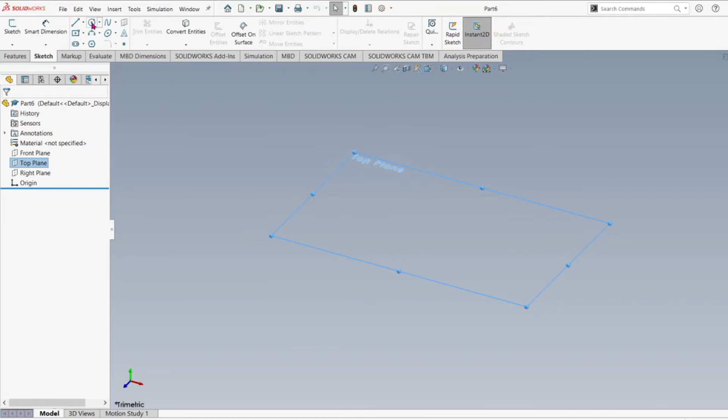First of all, we're going to go up to File, left click. We're going to click on New, left click on Part, say OK. Going to make a quick circle. Going to use the top plane, going to left click that to select it. Then I'm going to go up here to circle, left click. I'm going to lock it to the center, just going to drag it out.

Let's go ahead and put a dimension on that. I think we can do it in several ways. You can highlight this box down here and type 5 inches. Or you can put a smart dimension on it. I like doing smart dimensions because then when I open the sketch I have the dimension right there in front of me. So I'm going to change that down to 5-inch diameter and we're going to say OK.

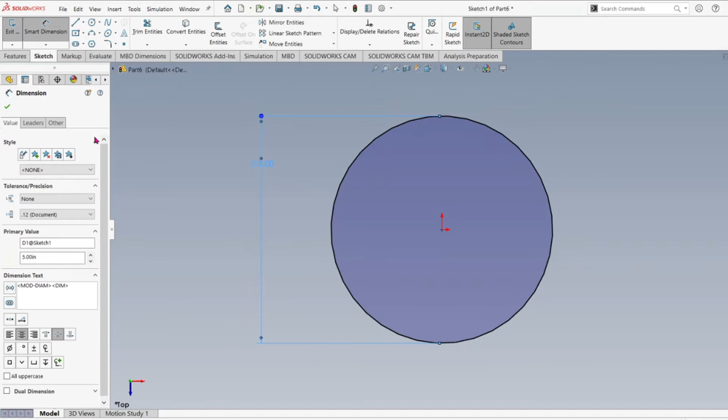Then we're going to do a feature. We're going to do an extruded boss. And I'd like to usually go in the opposite direction there. We're going to do a blind and I'm going to give it a dimension of 2 inches. Maybe we'll change that to like 1.5 inches.

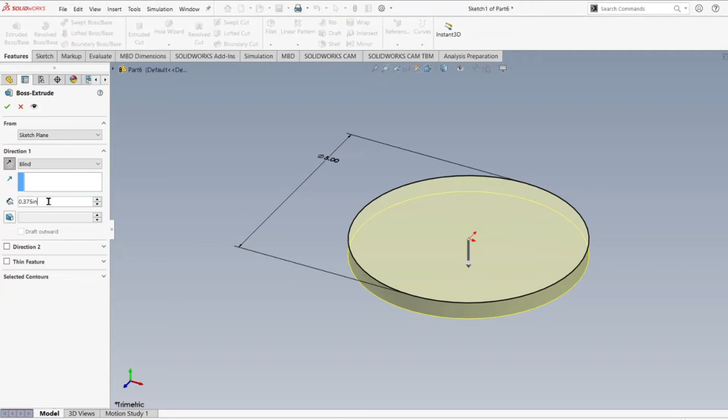Now anytime you want to, this can be a calculator. Let's say you don't know the decimal equivalent to 3/8. You should be able to type 3 divided by 8 and it should give you the .375 decimal equivalent. Most of these dialog boxes will allow you to do the math right inside the dialog box. Let's say you don't know what 13/16 is, so you go 13 divided by 16, and that'll give you the .812 dimension. So let's just leave it there and left click on the OK box, and that creates a solid plate.

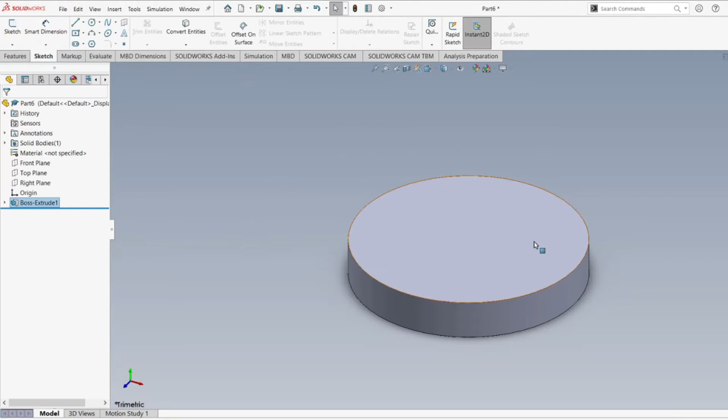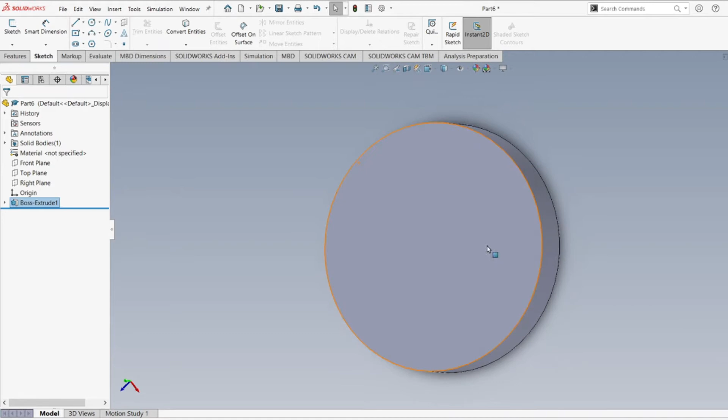There's a couple of ways. Let's first off start with the hole wizard. We got to put a hole in there. I'm going to do a tapped hole, and I want to do a bolt circle around this circle. I don't know if this is the best way, but I'll show you a couple of ways to control the bolt circle. So let's go up here to hole wizard, which is under features, drop down on the arrow, click hole wizard, left click on that.

And it gives us all different types of hole types we can do. We can do a counter bore, a counter sink, a straight up blind hole or through hole. Then we have a straight tap, which is the one we'll be using. Then here we got a tapered tap, so an NPT tap. Then here we have a customizable counter bore hole.

These counter bores up here are basically standards for, let's say, a 3/8-16 Allen socket head cap screw. This is the size in the machinist Bible that you should make your holes to. This would be a counter bore that you could customize. And then we also have the counter bore slot, countersink slot, and just a regular slot. So you can pick each one of these as a different attribute.

So for right now I'm going to do a threaded hole. I click on straight tap, left click. Then I drop down here to the size and pick a size. Should we do 1/2-13? So roll down here to 1/2-13. There you are. So that's 1/2 inch diameter, 13 threads per inch. Through all is what I'm going to do, not a blind hole. If you wanted to do a blind hole or up to next, you do blind and then you can put the dimension in here. In this case, I'm going to do through all.

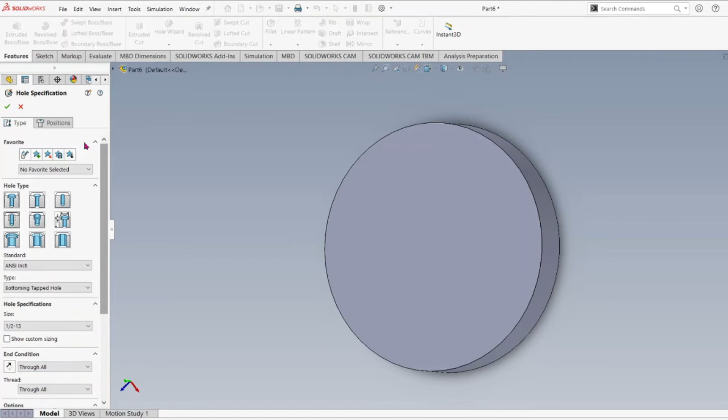So now I pick a position. The position tab up here, I left click on, and I just roll over here and click a spot on that face. The first time it clicks, it picks the face or the plane, and then the second time I'm going to just drop it in there. I'll dimension it later.

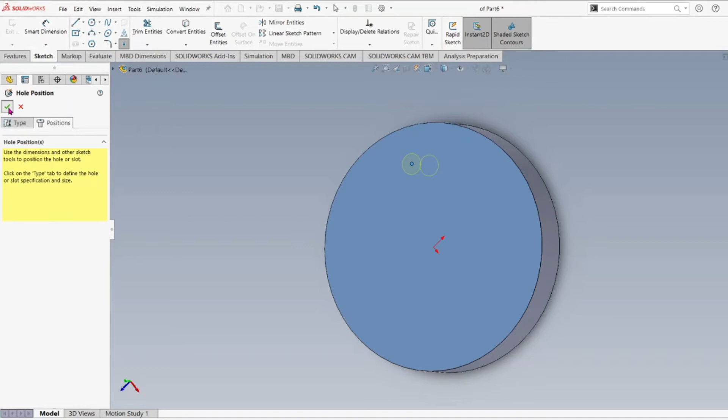I'm going to say OK to that, and there's our one threaded hole. What's nice about the hole wizard is that all this information that's in here, when we go to make a drawing, when we go and pull up the hole callout on the drawing side of things, it'll have all the information already there, so we don't have to retype it all in. It's going to pull the data off of this information here and then display it in the drawing.

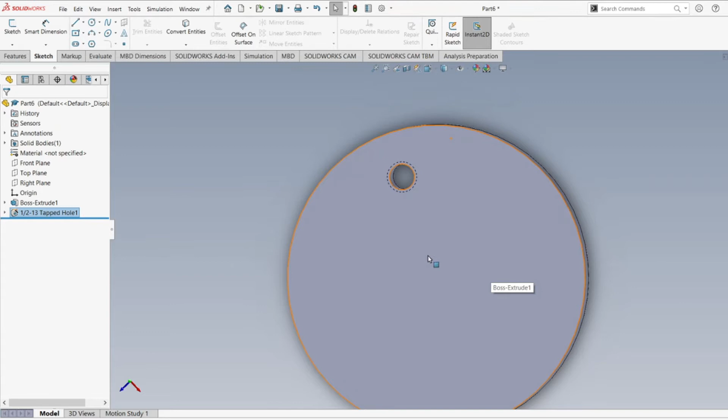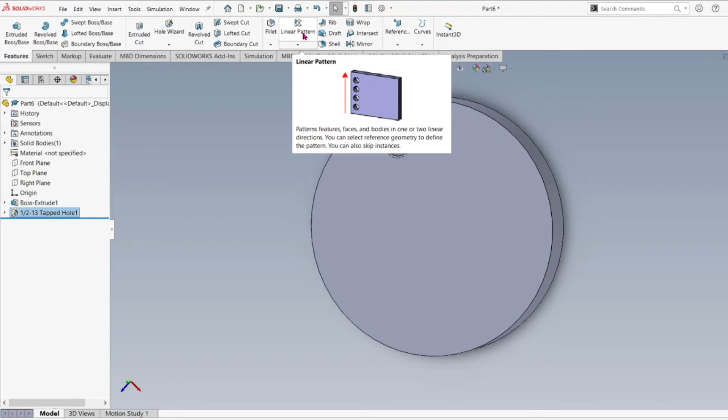So now we have a hole, and we want to do a bolt circle. Let's say 6 holes on a circle. So one way we can do that is we go to Sketch. Actually, we got to go to Features, and then we go to Linear Patterns here. We're not doing a linear pattern like a checkerboard. We're going to do a circle pattern. So we'll click that feature.

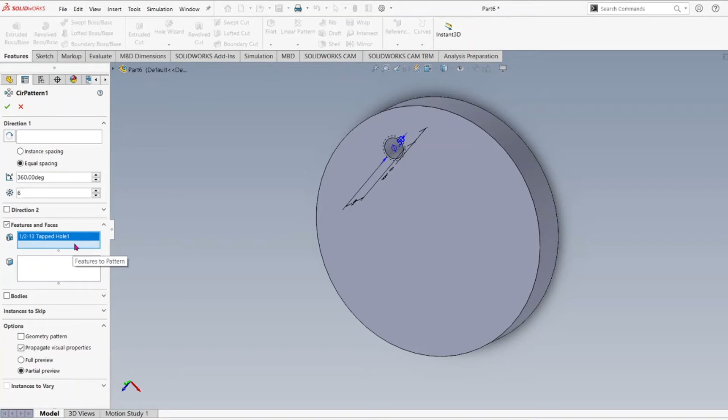It kind of knows what we're picking because it was the last thing. If it wasn't that, you could left click in here, clear this selection, and then pick that hole again, and it'll pick that feature. Another way to do it is clear selection. If you come up here, you can drop down the feature tree with this arrow, and I'll just click the half 13 tapped hole. So there's a couple of different ways to do that.

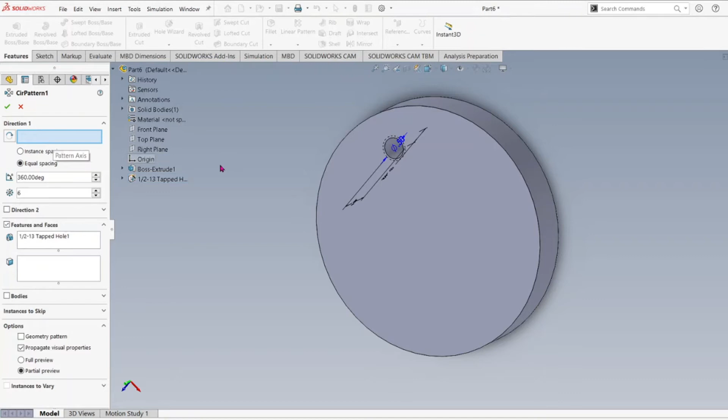I'm going to do equal spacing. I'm going to do 360 degrees, so all the way around the circle. I'm going to do six holes total, including the one that's here. So that's a total of 6 only. Then in the direction of rotation, you left click in there, highlight that box, and you can now pick this outside diameter, and it creates 6 holes.

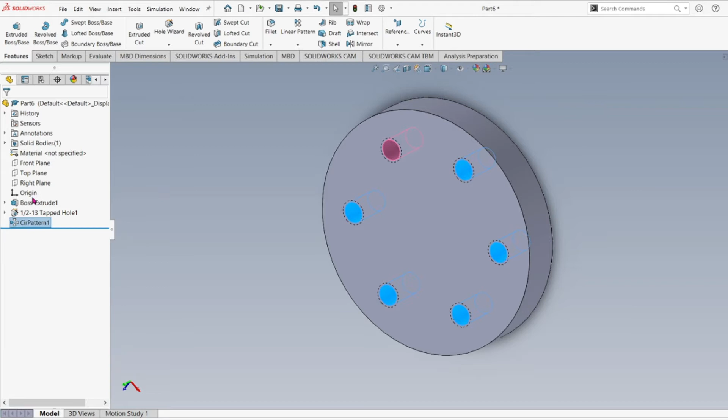All you do is say OK, and as you see in the feature tree, you have the original hole that we got all the data to, and then if you edit this feature, if you were to come over here and right click on it, it's got the edit feature. We can change how many holes we have. Let's say we go to 7 and then say OK. Now we have 7 holes. Very simple to make a bolt circle.

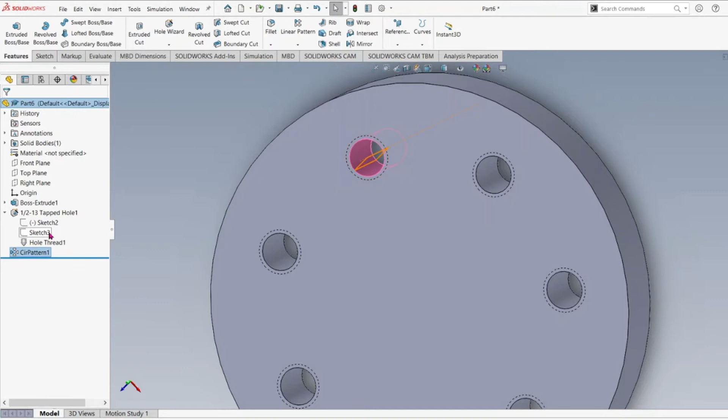The one thing that people seem to get a little confused on is the way these holes are made: you have 3 items underneath. If you left click this down arrow, it gives you all these sketches and this information. The first sketch, you can see, highlights the center point. So that sketch is designed to tell us where that center point is located. This next sketch is actually the cross-sectional profile of the hole. And then it basically does a revolve cut to make the hole.

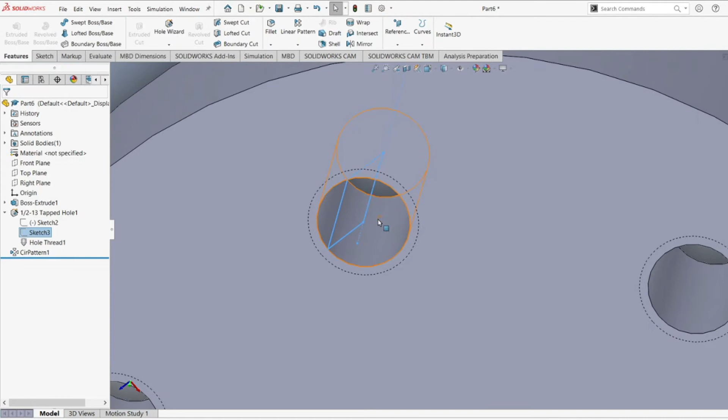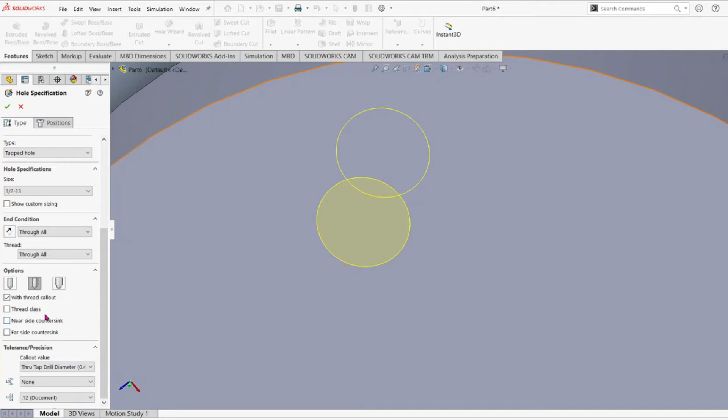Now let's go back here to half 13. I right click on it, and it comes up with edit feature. I'm going to show you, there's no chamfers on here. It says bottoming tapped hole, straight pipe, tapped hole. There should be some end conditions here. I can do a near-side countersink and a far-side countersink. So that puts a countersink on both sides, and then I can make that dimension whatever I choose.

Let's see, it's a half 13, so let's go .525. Looks like the standard was .550 or default value. So I'm going to change them, and you could also change this from 90 degrees or 60 degrees, depending on which you would choose to have as a chamfer.

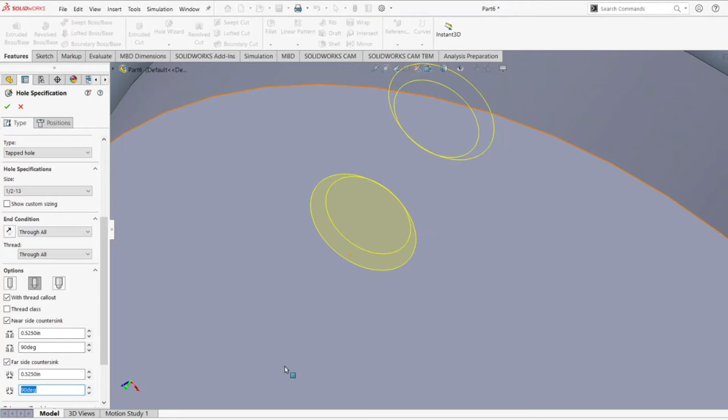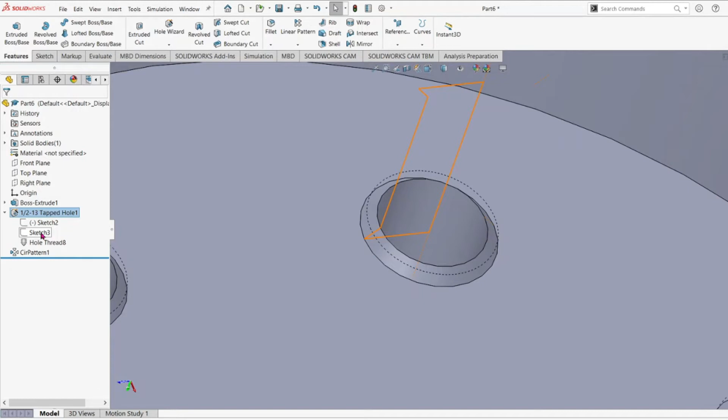So with that done, now if we go back to the cross-sectional sketch of that hole and how it's built, you can see that the chamfers are in the sketch profile. So when it does the revolve, it cuts the chamfers that way. But for the most part, I'm not too worried about the profile of the hole. It's in there, it's got the data.

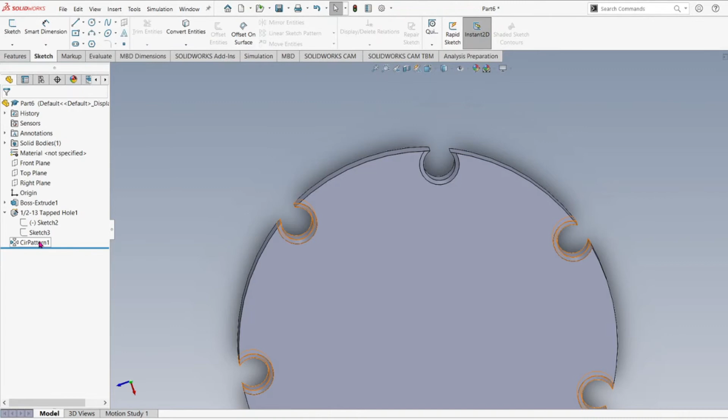Here's your cosmetic thread defaults. I probably don't mess with that too much. This is the big one I'm concerned with, this first sketch. If you right click on that and you edit that sketch, you will have one asterisk that's laying in the middle. And I can move that around. If I move it out to the edge here and I go ahead and rebuild it, it moves all the holes. Because again, it's built off that first one, and then the circle pattern's built off of that information.

Go back up here. First of all, what I want to do now is I want to make that normal to that, so it's square to my eye. So I'm going to right click, and then I'm going to use this little plane with the arrow, normal to, and that brings us right up here. Now this asterisk is our original sketch, and I kind of like to move it up to this position, 12 o'clock, to start there.

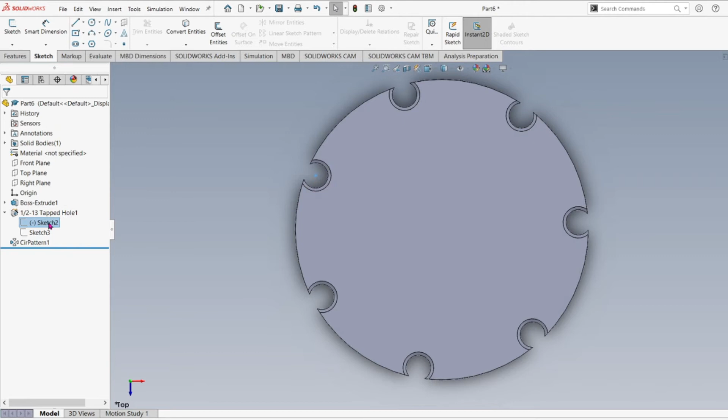So I'm going to go over here, right click, and then left click on the edit sketch, and it just gives us this dot. I'm just going to left click and drag it over towards the center. Then I'm going to create a center line or construction line. From the center, I'm going to lock it in. And then I'm going to left click.

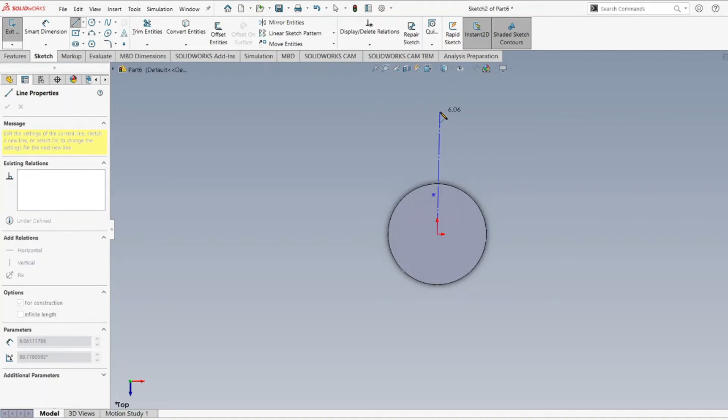You can't see the yellow box, but that says vertical, and if you move off a little bit, it goes away. Then it comes back. It's right underneath the pencil or pointer. So I want that to be yellow vertical. And then I'm going to draw, nope, don't need a line there. I only need the one line.

And then I'm going to force this center point to be locked to this line so it's right in the center of the part. And we do that by Sketch tab, then you add relation, and it's going to ask for the entities. What do you want to lock together? So I'm going to pick the center point of the threaded hole and the line, and now I got both of those items, and it's going to say what? Midpoint, coincidental, or fixed. We don't want midpoint because I'm going to control the diameter.

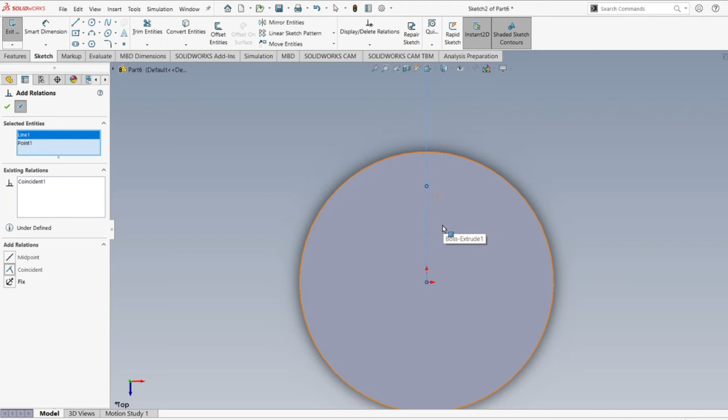Coincidental is what I want. I just want it to be locked to that line, somewhere on that line. And fixed means it wouldn't move from the position I'm in, or both items would be fixed, and there's no way you can dimension them or move them. So I'm going to say coincidental and see how it moved that point over. So now it's locked. I'm going to left click OK to that. Now it's locked to this line. I can't move left or right with it, but I can move up and down.

Then I'm going to go over here, left click on Smart Dimension underneath the Sketch tab, and I'm going to go from the center to this dot to the asterisk, or the center of the tapped hole, and then I would make my dimension like 2-inch radius. We could double click on that and we'll change that to 2.125.

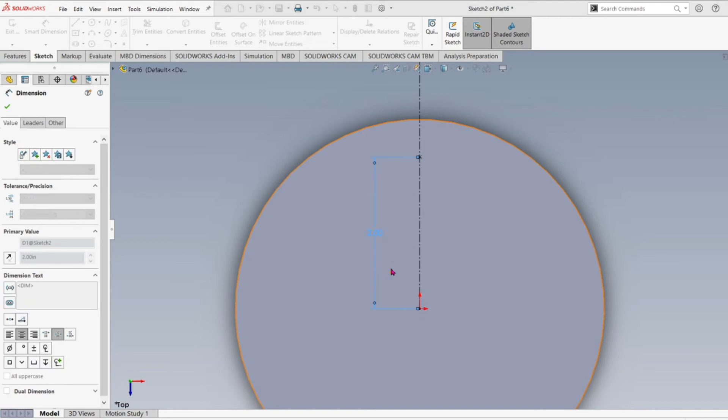So now I controlled, as you can see, this line is black. The asterisk is black. I don't know if it shows up on video real well, but when entities are black like that, that means they're fully defined. And it even says down here, fully defined. So that tells me that I can't put any more dimensions onto it. So I'm going to say OK to that. I'm going to now rebuild it. And it's going to update the rest of the holes to go in line with that.

Now if you wanted to have that off center, you go back here to this sketch, right click, and then left click on Edit Sketch. And I could add another center line, not a line. If you run a line, it's considered an entity. If you run a center line, it's like a construction line. It's just there to drive what you want to do. So if I put in another one,

what I'd have to do then is click on the center point, and as you can see, there's some existing relations. Distance I want to keep, but the coincidental I don't. So I'm going to say delete that, not delete all, just delete that one. Now if you see, that asterisk went blue again, which means now it's free to move off that line. So I'm going to hover over it, left click, hold down the left mouse button, and I'm going to drive it over to this one. See, sometimes the snaps on, you could do an automatic snap, but my whole purpose here is to show you how to go through the process of adding a relation.

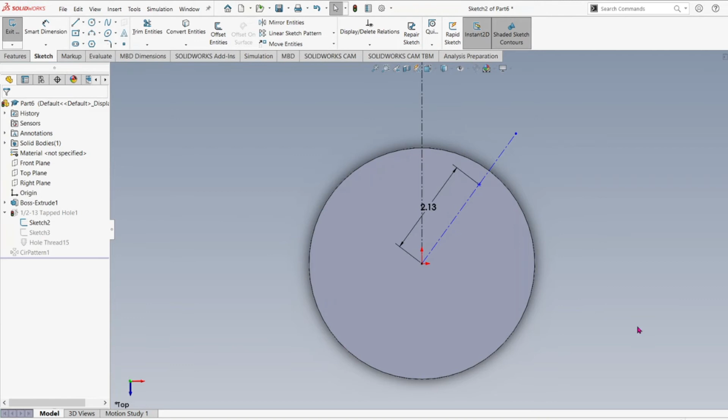But as you see, they're both still blue lines. The point is blue, and the line is blue. That means it's not fully defined. And what I mean by that, I can still move this line. See how that center point follows?

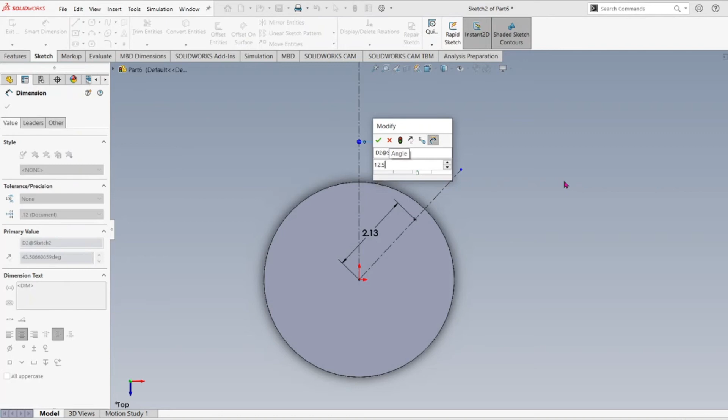So now what I can do is I can add a smart dimension under the Sketch tab, and I can do the degrees or the angle to control it. If I want to start at 12.5 degrees off of center, that's where it'll start. And then I can say OK, and it'll still give me the holes when I rebuild it,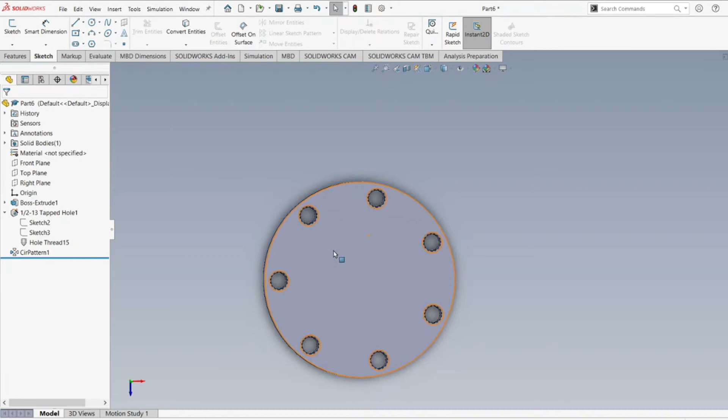but it'll be 12.5 degrees off center. And that would be useful if you're timing with a slot or some type of hole out here. You may have to time and lock those together. So that is one way of doing hole sketches.

Now the most common way, or at least the way I've done it, is usually I have a center line in the middle of the part. But since the way we built this boss with this sketch here, we didn't have a center line. So I'm going to pick a plane. I know I'm already on

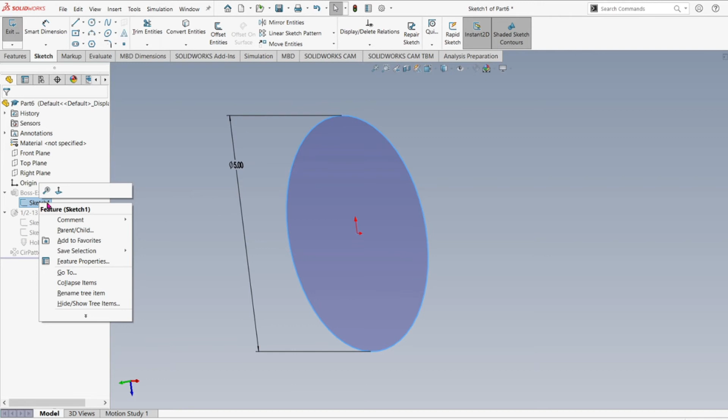the top plane going down, and I know that I'm going to left click this button here. I'm going to pull this sketch up. I'm going to edit it, right click, and then left click this. I'm going to bring it normal to. I know I clicked the center point and locked it to the center triad in SolidWorks. So that's a fixed point.

So I know that if I built it on the top plane, my right plane is going to go right through the center of it. And then on the right plane, I'm going to draw a line so that we have something to reference to use it as an axis rotational point. I'm going to go ahead and rebuild.

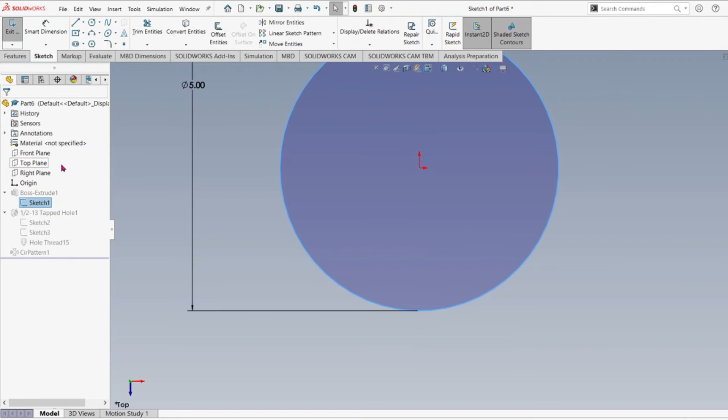So like I said, I'm going to build in there on the right plane. I'm going to draw a line, a center line. I'm going to come right off the triad and lock it in. You can't see it, but there's a little yellow thing that says coincidental. And I'm going to drag it out. And again, this is not locked vertically or horizontally to that surface.

As I bring it down to center more, you'll see a little yellow thing behind the pencil, and that'll lock it in vertical, which should be a black line when I'm done with it. I should have to do no more relations to it. And it is. It's a black line, and if we want to verify that, we can just click on the line, and it says right here, vertical. It is vertical.

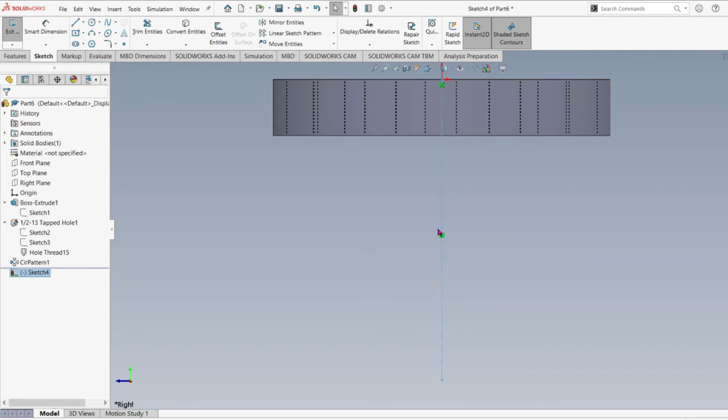It looks horizontal because of the way I got spun. But if you were to right click on here and go normal to, you can see why it's vertical. So that's a vertical line locked in, fully defined. And I'm just going to leave it like that and go rebuild. It's just going to be a reference sketch for me in the future.

So let's go back to Hole Wizard, that's under the Features tab, left click, Hole Wizard. I'm going to create another hole. I'm going to click on the Hole Wizard. Let's do a countersunk hole. Okay. Let's do 1/2 inch. I can pick whatever size I want. We can do 3/8 also.

I could do custom sizing of the taper. If this wants to do 100 degrees, I'm going to do a 60 degree. I'm going to do the width of the countersink diameter. What is it, 0.762? And then the diameter through is 0.397. Let's go with 0.400. Or you could use whatever they've got in here as defaults.

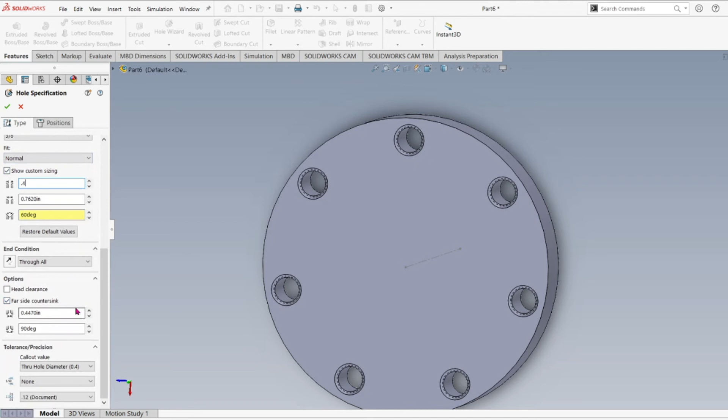You could do a far side countersink on the other side of the part and tell it what you want for that dimension. Now remember, with all of these dimensions, when you go to drawings, you'll do a hole callout, and it'll give you all the nomenclature in the drawing to fill in those blanks. So it makes it very easy to make a drawing on the drawing side.

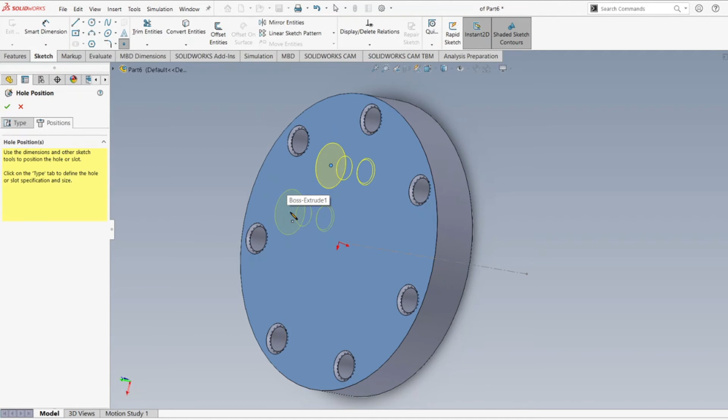So it looks good. I'm not too concerned about the size right now. Then I'm going to left click position, and I'm going to grab a spot right there. Again, the first click was to click the plane I was building on, and then the second click is just dropping that hole on that surface.

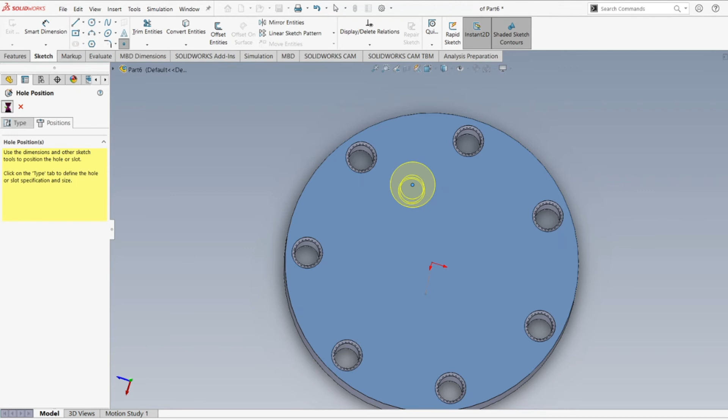Now I could do more holes. If I was doing like a square or something like that, or I was only doing 2 holes, I could drop 2 holes and then do the dimensioning off of that, but in this case I want to do a circle, so I only need 1. So I'm going to say okay to that, and it makes a countersunk hole with the dimensions we want.

Now here's the difference. I'm going to come back over here, left click on the arrow, and then I'm going to edit this. Not yet. What we want to do is create our 4 holes in the center. So I'm going to go back up here under features, and I'm going to do a circular pattern again. And it's asking me what feature, so this time it didn't pick it up, but I'll just pick it up here. Now it picked that up. I'm going to do 4 only, so I'm going to change this to 4.

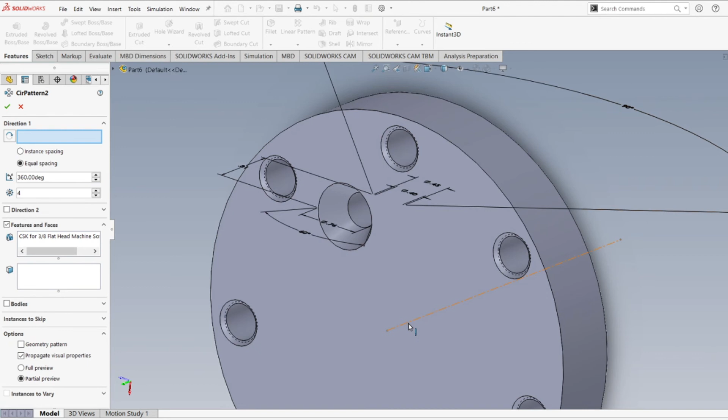But here's the difference now. This is what I'm talking about. Before I was able to pick up this outer circle to make it work. Well, this time I want to force it around this axis, this center line that I made, and it's going to rotate around this center point. So click on that, and then I'll highlight this, and as you can see, it did the exact same thing. It spun it around that center point. So now I have my 4 holes.

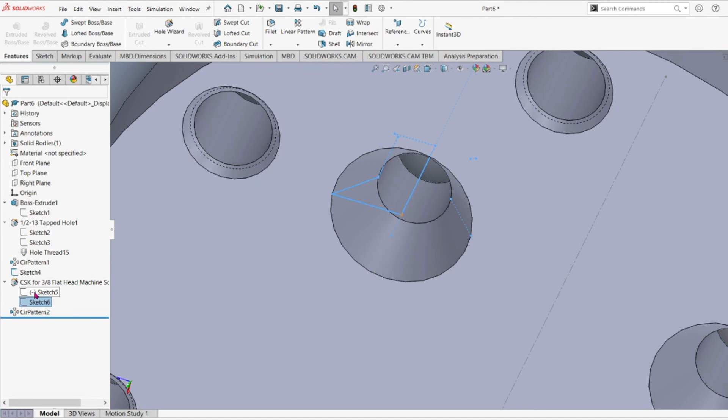Now let's see if we can drive the first hole in its right position. So again, if you don't see it, you got to hit this little arrow on the side here with your left mouse key, and then you only have 2 sketches because we don't have a threaded hole now. So you have the sketch of where it's located, and then you have the sketch of the actual profile that it did a revolve cut around this axis in order to make the profile. And what I want to do is edit this sketch, the position sketch.

Well, let's make a normal to first. It'll make it easier for me to orientate it. Now remember, if this is normal to, this is where we drove the other one up on this threaded hole here, and I think it was 12.5 degrees off center. Now this hole is over here. I'm going to right click on this, left click on edit. The holes go away. See in the feature tree too, since the circle pattern is built off of this, it can't build a circle pattern. So it just suppresses it until we get done with what we're doing inside this sketch.

So I'm going to go ahead and move that up to my center point. I'm going to draw another center line, and I'm going to make that horizontal or vertical, whichever it is. Looks like it was vertical. I'm going to use the escape key here to get out of the line, and then I'm going to click on this, and then I'm going to right click and delete that entity. Don't need it. Remember, the line is black, so it's fully defined. If I click on it, it'll tell me that it's vertical, so we're locked in place because we're locked on the center triad, which doesn't move. It's locked in space in SolidWorks.

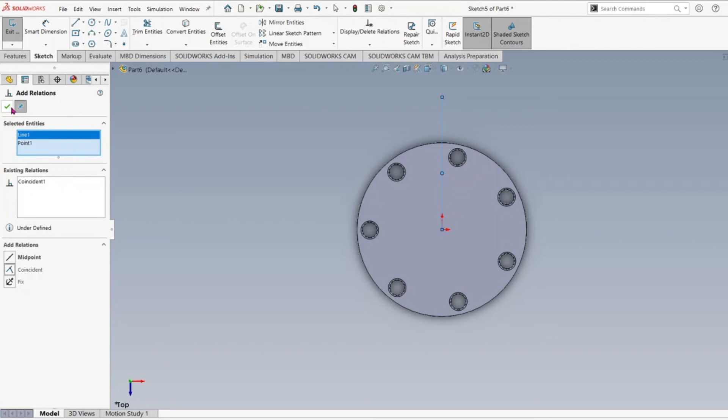So that's completely defined. Now what I'm going to do is bring this to center by using a relation, add relation, this center point to the line, coincident. Alright, so now if we click off here, it's still blue, the asterisk is blue because we don't have a dimension driving how far off center we are. So I'm going to put a smart dimension, left click on that. I'm going to click the dot, the center point, and the center point of the part. That looks like it's going to be too far away, so let's put it 1.312.

I don't like that either. I think we'll go to 1.437. If you don't know that, you can do 1 plus, using the shift key, 7 divided by 16, then close it, and it should give you 1 7/16. So it gives me 1.44 - no, 437, excuse me, that's right.

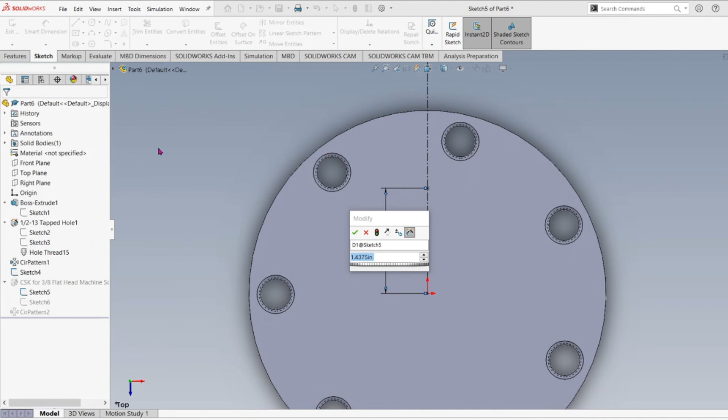When we go here, it only gives us 2 decimals, and in previous videos I showed you how to change the default on that. Maybe at the end of the video I'll show you a little bit. So it says 1.44, but it's actually 1.4375.

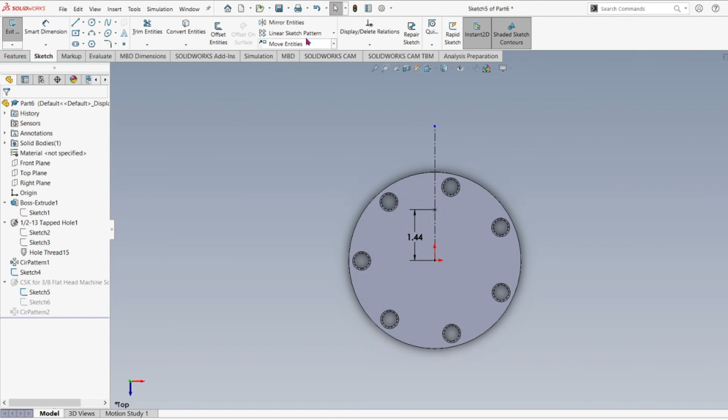Okay, so that locks in that dimension. We rebuild, and it's going to put 4 circles equally spaced, so they're 90 degrees apart.

So there's 2 ways we can do bolt circle using the hole wizard. And like I said, the precision of this whole part - what you do is come down to this area here, right click, go to document properties, go under dimension, primary precision. I want to change that to 3.

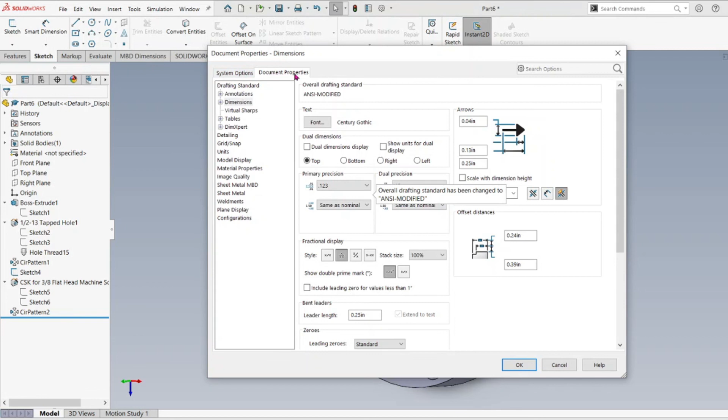That's going to change the properties for this document. This is not system options, it's just this document. So when I save it, and let's say we go back here to edit that sketch again, the position sketch, now you can see it says 438 when it's actually 437.5, but it rounds it up because our primary precision is 3 decimal points.

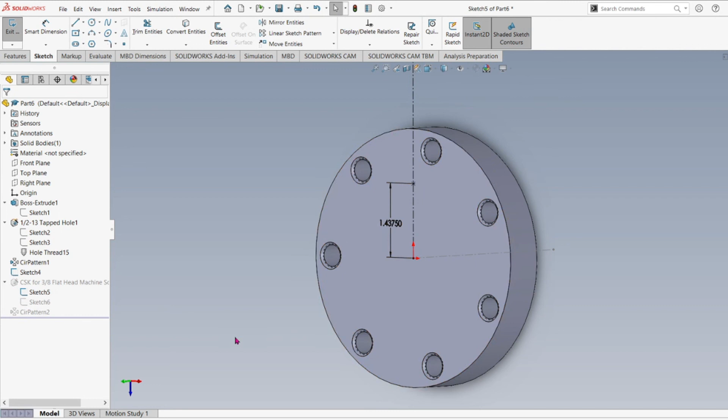Now if we wanted to, we'll go back and rebuild. We can go back down here, right click, document properties, dimensions, and we could do 5 decimals if we wanted to. Now if we go over here to edit this sketch, it'll show us 5 decimals. We'll go ahead and rebuild that.

That's your basic bolt circle using feature-based patterns. There is a sketch pattern up here, but since with the hole wizard the way it is, it's more of a feature, so that's probably how I would build it.

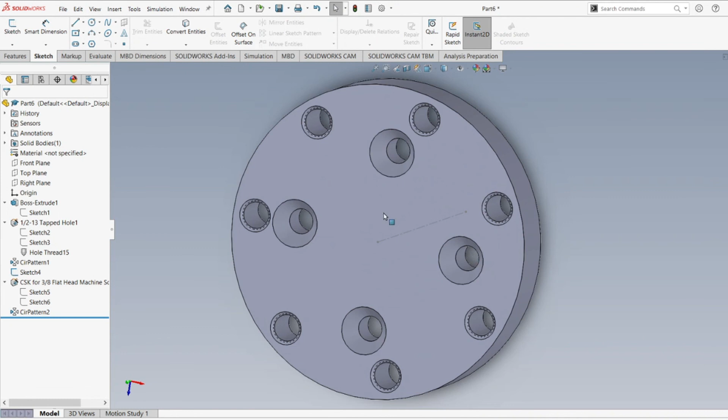If I wanted to, I could just click on this surface, create a circle. It's not a hole, it's just a circle. And then in sketch base, see, got the same linear sketch pattern or circular sketch pattern. And there it shows off the center point. It already kind of knows that. Yes, that's what I want.

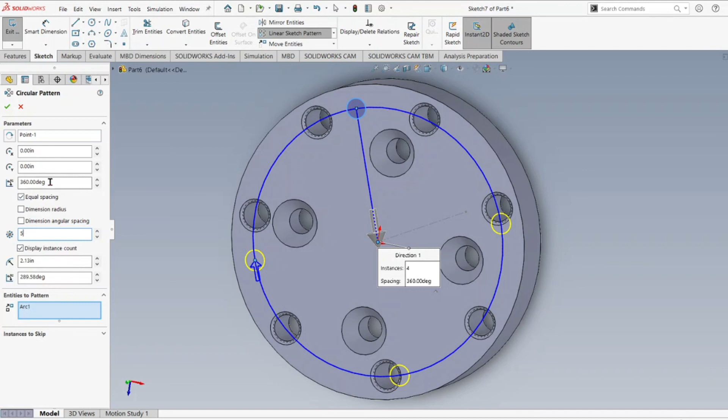Let's see, probably put 5 in instead of 4. Okay, 360 degrees, and you can say okay. Now if I move this around, I can kind of control it. Let's go to the center here. So now this is 5 sketches.

We still haven't made a feature. So if you rebuild this, it's only a sketch on there, it's not a feature yet. But I can take and left click on this, highlight it, go up to features, and then I could do an extruded cut, which then we can say if we want a blind hole, let's say we don't want to go all the way through, we only got to go through 0.5.

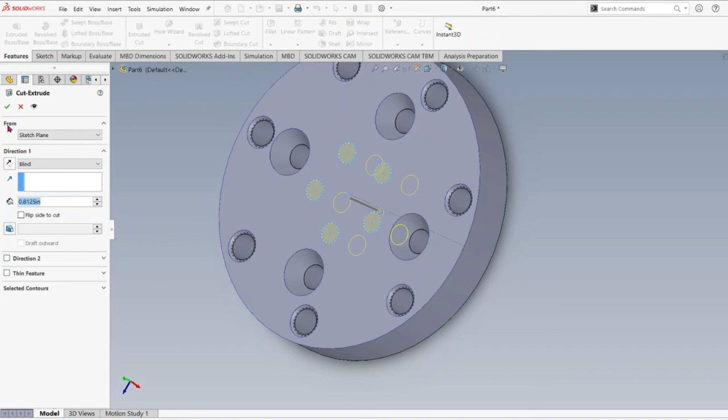Now we have a hole that's blind, it's not all the way through, but it makes all 5 features at the same time off those sketches. The tricky part about this is, if you can see in the feature tree here, you can easily see that there's a sketch pattern or a circular pattern feature.

This one is a little more difficult to understand, because you go to the sketch and you edit the sketch, you're going to probably only have 1 dimension in a line like we did before, and you're going to be like, well, I can't control these, you know, they're all locked together. So you got to figure out how to get to that pattern. And see how I did that? I just clicked on one of the holes and it came up here with 'there's a patterned relation.'

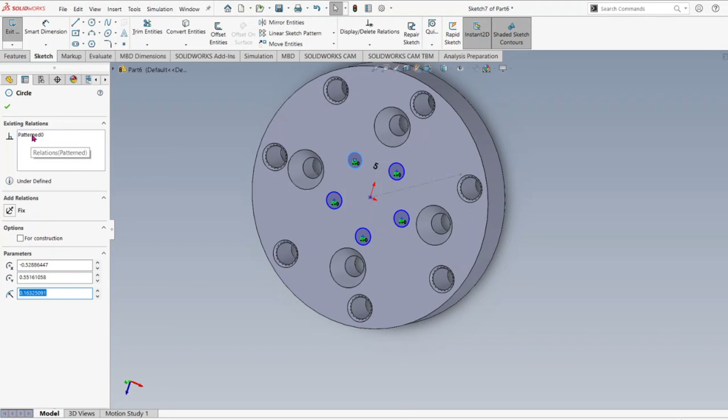You can right click on that and you can edit the pattern. And there you got all your information to change if you want to make that 10 holes, you know, or whatever you want to change, where it starts, the diameter, because you can actually do the diameter again.

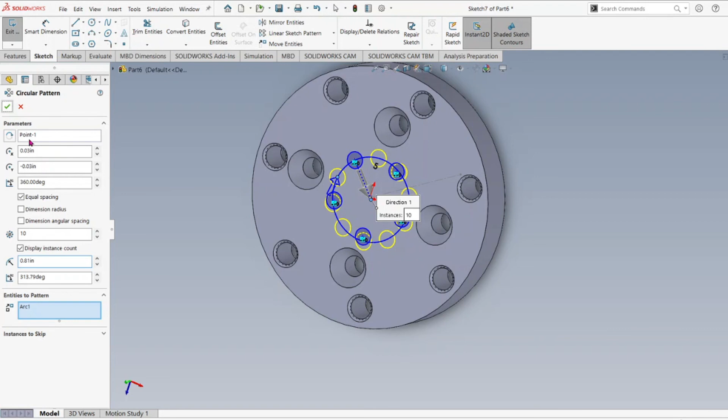I'd rather do a smart dimension, so when I open it up, I see it, versus here, you know, we could go 0.812, and we could push that circle out. And again, that's radius, not diameter. So now we have 10 holes, and if we rebuild, then we'll have 10 holes in there.